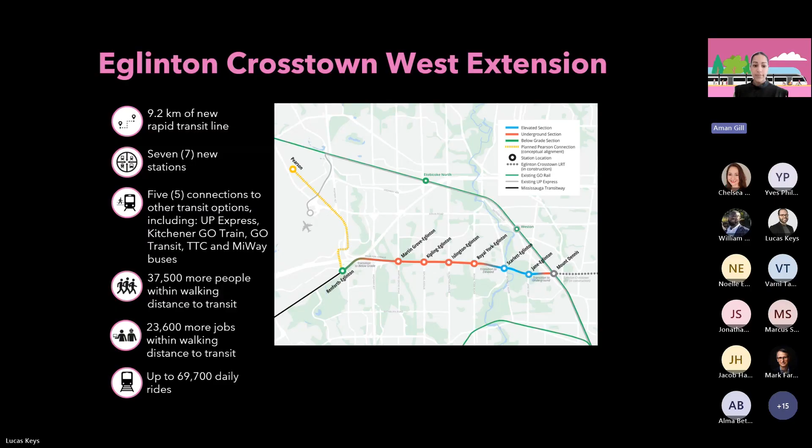Right, we've started construction on a lot of the segments of the project, including the elevated guideway, which a lot of you may have seen if you've been in that section along the Humber River. So I'll start with the ATC1 project. Those are the tunnels between Renforth Station to just west of Scarlett Road. So those are just nearing substantial completion. We've got our elevated guideway between Scarlett and just east of Jane, which is well underway. We've got our east tunnels between Fergy Brown Park and into Mount Dennis Station, which is also underway, that awarded to Strabag, and the guideway awarded to Aecon. And our station's rail and systems contract is currently in procurement and should be awarded later this summer.

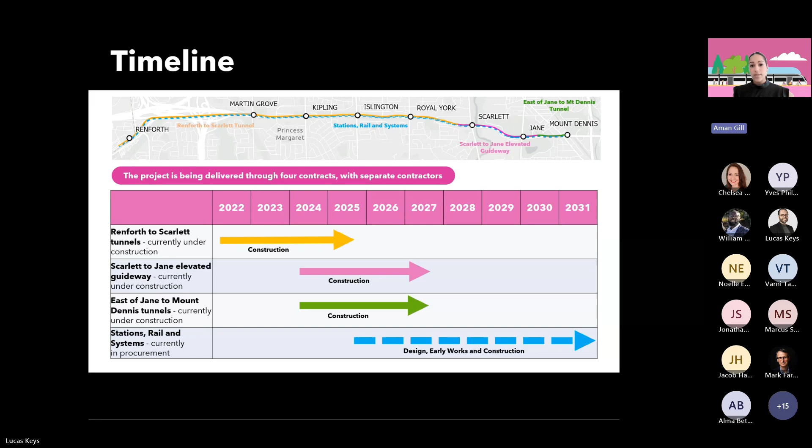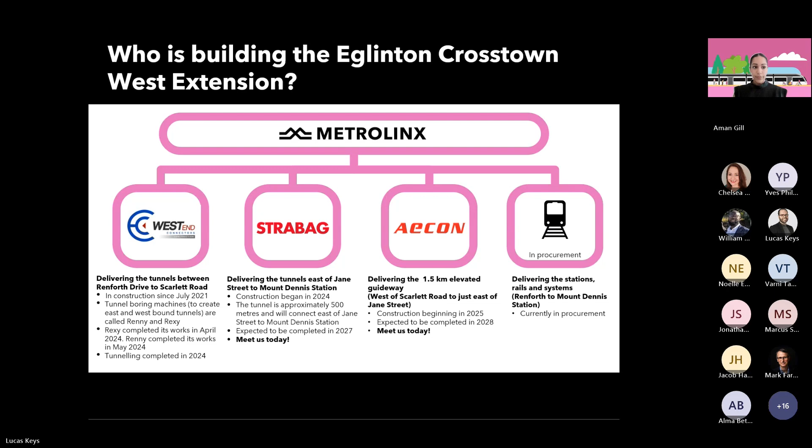Right, as I've just gone over, we've got our 4 contracts. So our 4 contractors: West End Connectors are just about nearing completion. We've got Strabag delivering the east tunnels between Fergy Brown Park and Mount Dennis Station, Aecon delivering the elevated guideway, 1.5 kilometers between Scarlett and just east of Jane, and our station's contractor, which has not yet been onboarded. Right, with that, I'm going to hand off to Varni and the team from Aecon to go over the elevated guideway construction updates.

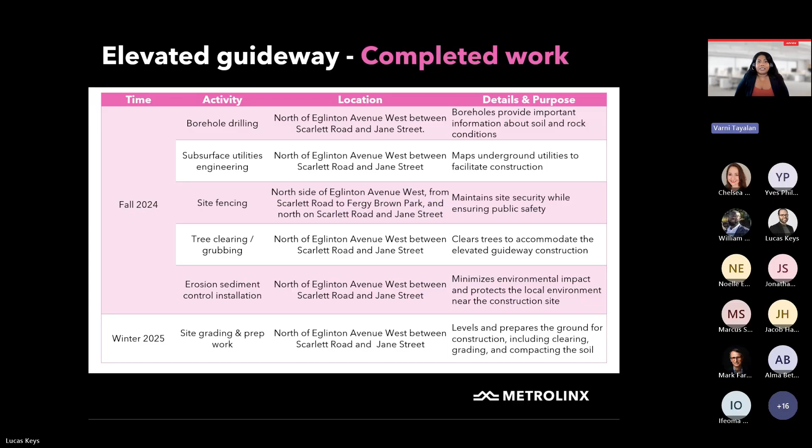So as we continue on with construction, one of our key environmental focuses remains erosion and sediment control installations and maintenance. The basic goal of these controls is pretty simple. We're trying to keep as much sediment on site as possible and prevent it from washing into nearby sensitive areas like the Humber River or any adjacent wetlands. So this helps us protect the stability of the work site, but also preserve water quality and prevent issues with nearby aquatic life.

You'll see us using a combination of temporary and permanent control measures throughout construction. These will include silt fencing, mud mats, coir logs, and erosion control blankets. Each of these will play a specific role depending on the stage of construction that we're in. And because we're working very close to the Humber River and ultimately we'll be restoring this area, it's critical that we keep control of erosion from day one. So next slide, please.

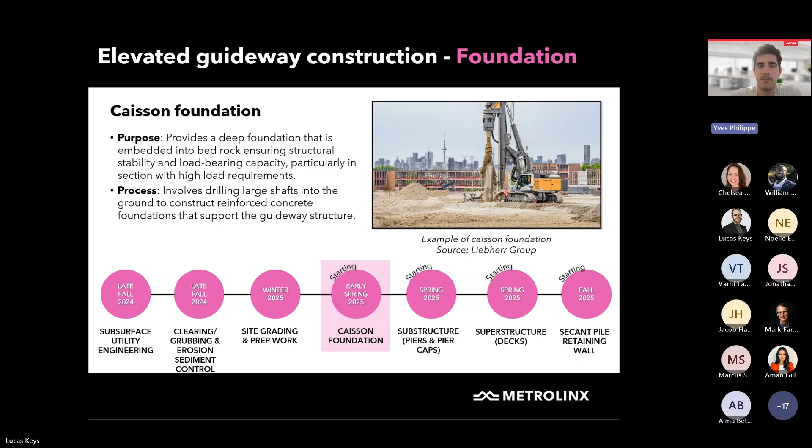Then after that, we have the substructure element. We have the piers and the pier cap. So that's what goes on top of the caissons. The goal of these is to support the bridge by transferring its weight to the foundation. So this is for the column, and on top of the column you have the pier cap, which distributes the load evenly across the piers, ensuring strength and stability.

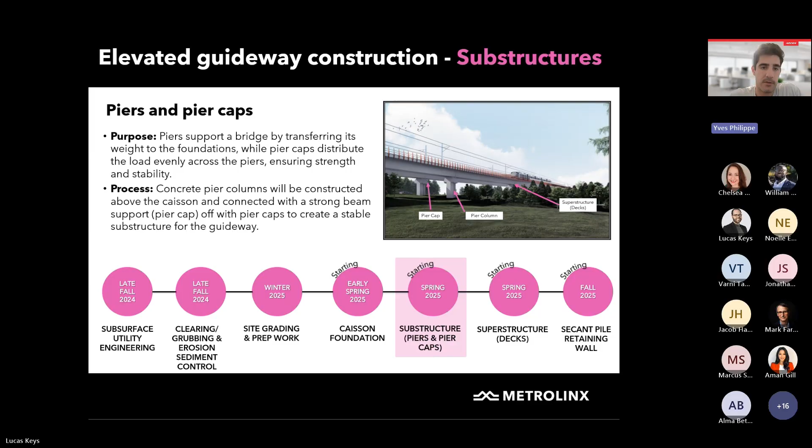So how are we doing that? We are installing a reinforcement cage on top of the caisson. After that, we use a steel form, and we place concrete. And to do the pier cap, it's the same thing. We place a reinforcing cage on top of the column, we install a steel form, and then we place concrete. Next slide.

So once the pier caps are built, we can start working on the decks. The decks are the main horizontal structure that supports the transit system and distributes the load to the piers and the pier caps and then the caissons.

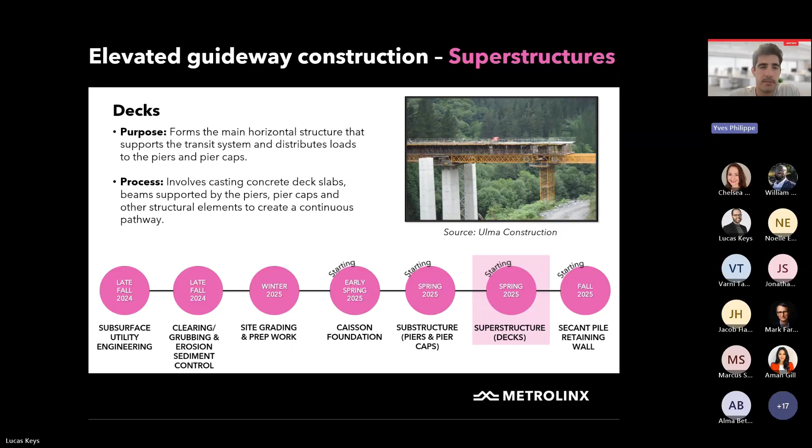So how we're building that, you can have a look at the picture. We use a temporary shoring system that allows us to place the formwork on top of it. And once the formwork is installed, we place some reinforcing, then we install the forms, and then we place concrete. Next slide, please.

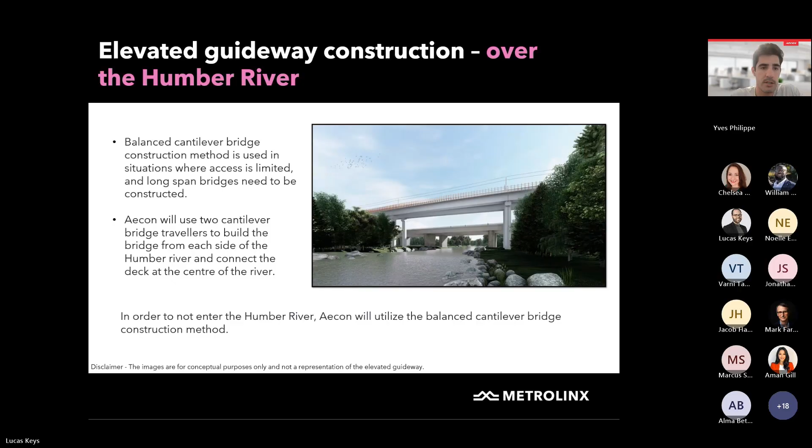So at the Scarlett and Eglinton intersection, we're required to build a retaining wall system that we call a secant pile wall. The goal of this is to provide structural support during construction, and it prevents movement of the soil, improves water tightness, and protects against erosion.

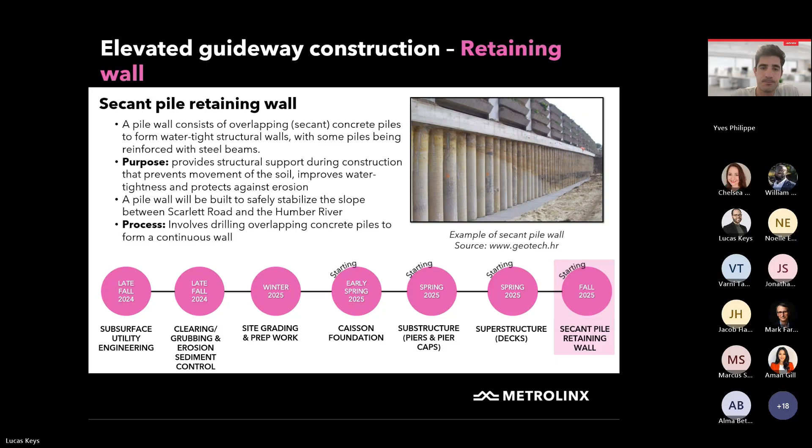So how do we build that? We use the same machine that we use for the foundation. However, we basically build concrete piles that overlap each other, and that allows us to form a watertight structural wall. So that's what you can see in the picture. Next slide, please. And I will leave that to Varni. Thank you.

Thank you, Yves. In this slide, we are looking at the construction impacts and the mitigations that will be in place for the elevated guideway project. For safety, we always ensure that pedestrian detours around heavy construction areas are enforced, and adjustments for access to public parks are also provided.

Access to local businesses: business continuity plans such as advertising and maintaining access to local businesses, and also buying locally throughout the project to ensure that we are sustaining business operations near our project. Noise and vibration impacts will be mitigated by monitoring the threshold on a regular basis, with activities completed during daytime hours only. Lane closures: we will ensure that signs, flag persons and detours are in place.

Mud tracking: this is to ensure that the mud on site is not carried out to public spaces. We will ensure that mud mats and street sweepers with vacuum suction are used throughout the project duration. Dust and air quality: dust suppression will be used by watering the ground regularly, which also helps maintain air quality. Construction debris: we will be providing daily housekeeping to prevent buildup of dust and ensure construction waste is taken care of. Next slide, please.

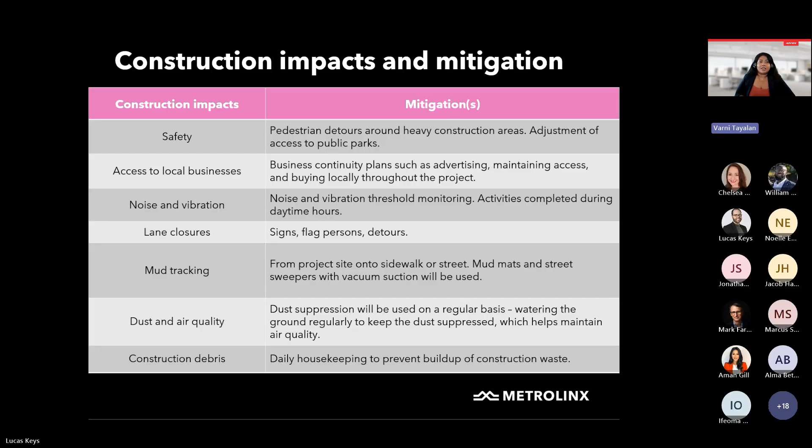Okay, in this slide, we are looking at AECON's community benefits plan and a program that is in place for the Elevated Guideway project. This is our hiring report since the beginning of the project from 2024 up until now. You can see that we have hired 43% BIPOC, that is Black, Indigenous, and people of color, in our project, and we have hired about 21% women. The 36% that you see here in purple are people who either did not report or who do not fall under the category of women or BIPOC.

To date, we have invested over $335,000 in the project through local and BIPOC businesses. And we have also invested $254K plus on Indigenous business investment. This is with A6N, the organization we use to help clear the trees and do our early works. 51% of the shares of A6N are owned by the Six Nations of the Grand River Development Corporation, which belongs to the Indigenous community. And for community benefits engagements, to date, we have completed up to 31 engagements.

This includes outreach, presentations, and information sessions to ensure that we are building awareness about careers in construction and also letting them know how they can find jobs in large infrastructure projects such as the Elevated Guideway project. In order to define what we mean by local for the Elevated Guideway project, we have defined it by about 11 postal codes you can see here, and any local businesses that fall within these postal codes will be considered local to our project.

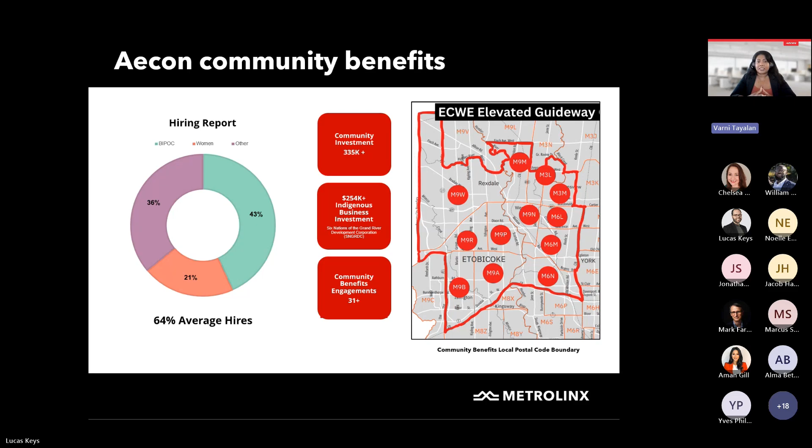That's it from me, Aman. Thank you. Perfect. I'm going to hand it over to Noelle and team from STRABAG, Noelle and Jacob, to take us through our STRABAG updates. Thank you, Aman. It is a pleasure to be here. Let's go ahead to the next slide.

Before getting into construction, I did just want to give a little update on STRABAG for those of you who have not been introduced to us. STRABAG is a leading construction and infrastructure company. We are delivering complex, forward-thinking projects across Canada, and as part of the Global STRABAG Group, we bring decades of international expertise with a strong focus on partnership and quality. We work in tunnels, transit infrastructure, roads, and bridges, and we build solutions that connect communities and shape the future all across the world. So I'm going to hand it over to our Assistant Tunnel Manager, Jacob, to walk you through some of our construction updates. Jacob? Hey, everybody.

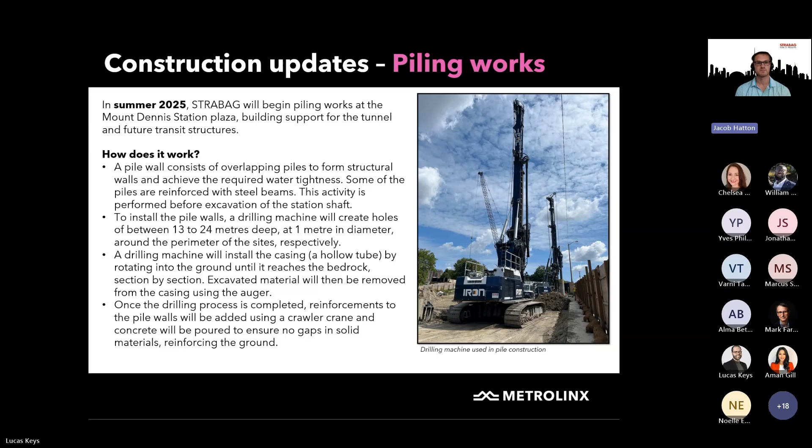Our last update here for construction is the cycle track. Phase 2 of the new bidirectional cycle path on the south side of Eglinton Avenue between Weston Road and Black Creek is now up and running. The new cycle track will replace the existing one that was on the north side of Eglinton during the construction of the Crosstown West extension. Next slide.

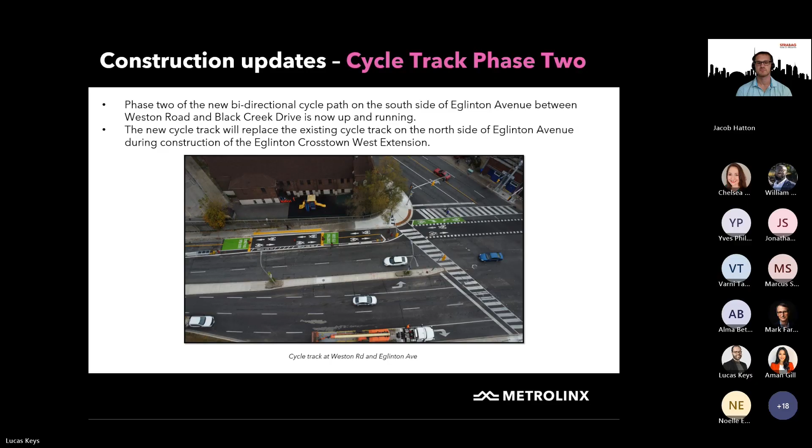Thanks, Jacob. So I'm just going to touch on our noise, vibration, and dust mitigation. STRABAG understands that construction in residential neighborhoods can result in noise, vibration, and dust. Alongside Metrolinx, we're committed to closely managing those impacts throughout the duration of the project. Noise, vibration, and dust levels are monitored around the clock, and the data collected helps guide necessary adjustments to our work. Community feedback is an important part of that process, and we remain focused on responding to public concerns in a timely and respectful manner. Go ahead to the next slide.

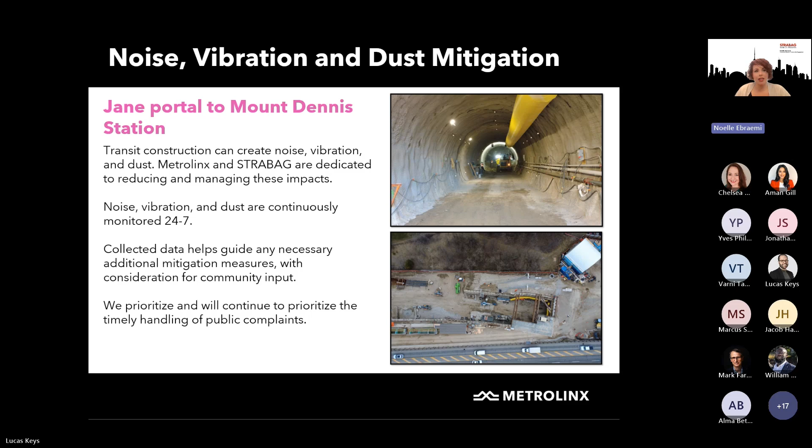STRABAG is also investing in the local community, so we're committed to creating meaningful community benefits through our work. We're actively ensuring that social enterprises and businesses owned by equity-deserving groups have opportunities to quote and bid on goods and services related to our project. To date, we have $69,000 in local spends. It's towards office supplies, printing, procurement, and lots of catering. And a lot of it is within the small area of Mount Dennis.

In addition to inclusive procurement, we continue to invest in communities where we work through initiatives like food bank drives for the Mount Dennis community and other local support efforts. We're proud to contribute to a stronger and more inclusive local community and economy. Next slide.

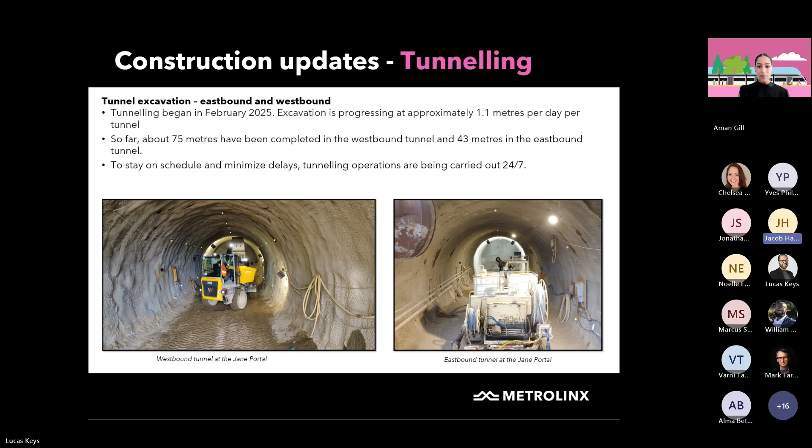Once the face of the excavation is actually exposed by the excavator, we immediately support it by spraying a layer of shotcrete. Next, we start our initial support. This consists of lattice girders, wire mesh, and more shotcrete. And then finally, when all these steps are complete, we install our pre-support, which consists of rebar spiles. And basically, we repeat this process bit by bit until we're done. Perfect. Thank you for that, Jacob.

I've actually got a follow-up question here for Yves. Regarding the height of the elevated guideway, how tall will it be in front of 1A and 1B Richview? So around Scarlett, it's about 6 meters high to let the traffic go under it. Just above 6 meters. Okay, great.

The next one, will the elevated guideway be lit up? So again, for the AECON team. I believe this is the question for Metrolinx. Our contract is only to build the structure. It might be a part of the next project. Right. Yeah, maybe I can jump in. I think that may be a part of our SRS contract, so our stations, rail and systems contract. But we can answer that in future open houses regarding stations.

Our next question here is for Strabag, I believe. Are trucks going in and out of the site right now? Yeah, I'll take this one. Yeah, they're coming in and out of both sites, so Jane Portal site and Mount Dennis, on a daily basis. Okay.

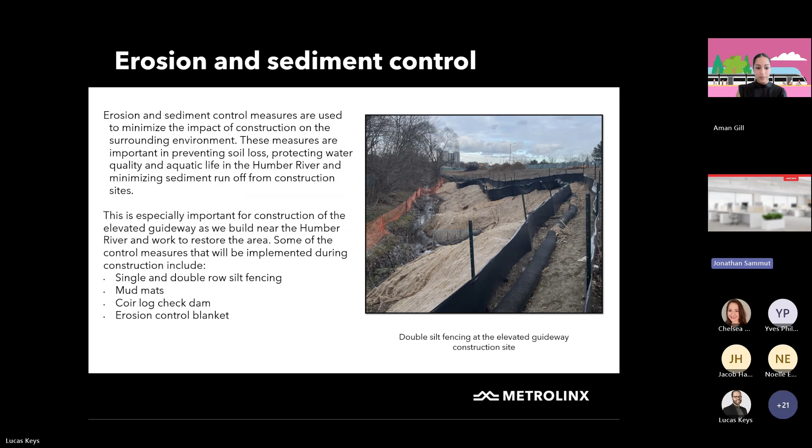The main thing we're doing is what we discussed earlier, the erosion and sediment control measures. Our current biggest impact on the natural environment right now would be sediment runoff if it were left uncontrolled. So that's our primary number one. That includes significant maintenance and monitoring associated with that. Also hazardous materials management, spill prevention and response. We go through significant efforts to ensure no hazardous materials leave our site and enter the local wetlands, storm systems, anything like that.

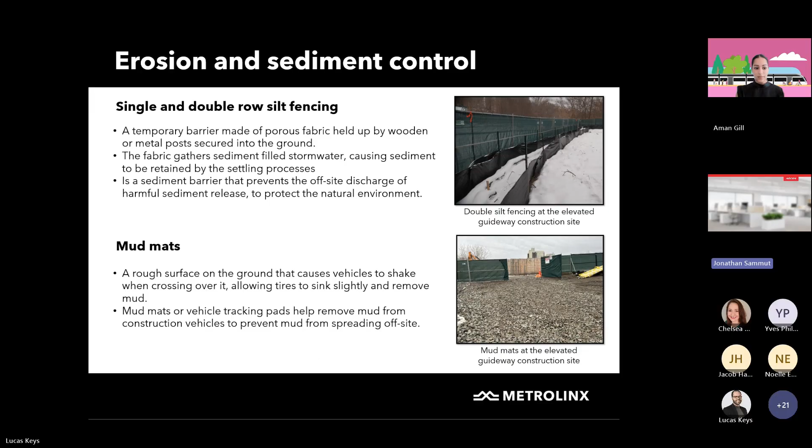And then additionally, we are supporting the overall project's species at risk management. We do monthly monitoring of all of our installed bat boxes to ensure that they're functioning as intended, and we're reporting out as per the Ministry of Environment, Conservation and Parks protocols and the permit requirements. So those are just a few of the things that we're doing, but in general, it's just about constant effort and maintenance of the things that we've put in place. So, yeah.

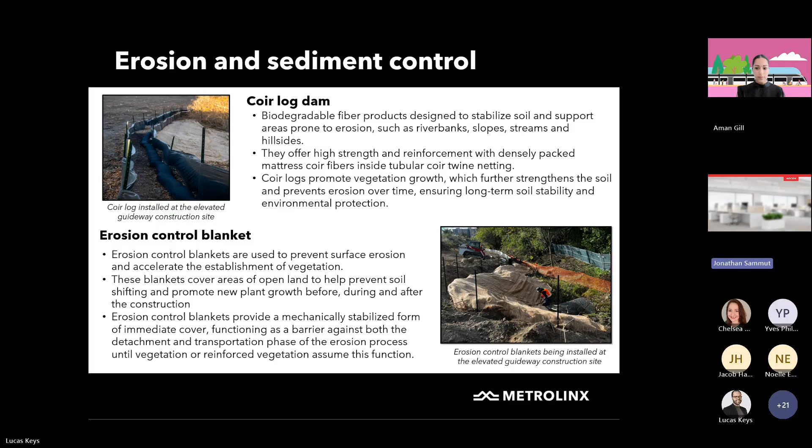Thank you for that. Our next question here, it's also for Aecon, but I suppose Strabag can also jump in if you'd like. How can we apply to work on this project?

Okay, I'll take on that question. We regularly post our job opportunities on our Aecon website. We also send these job opportunities over to over 15 community organizations that we currently work in partnership with. And we have also been providing this information to Metrolinx as well, so they can put it on their quarterly newsletter. We work with different types of community organizations across Toronto. So whenever there is an opportunity, people from equity deserving groups and also local communities can take part in it. Thank you. Thank you, Varni.

Next one for Strabag. Should we be expecting any other major construction? Jacob, do you want to take that one? Yeah, sure. No, there'll be no major construction outside of the limits of the actual site. We'll be doing the final structure once the tunneling is done, the lining and the final actual structure inside of the SOE, but nothing outside of the limits. Perfect. Thank you, Jacob.